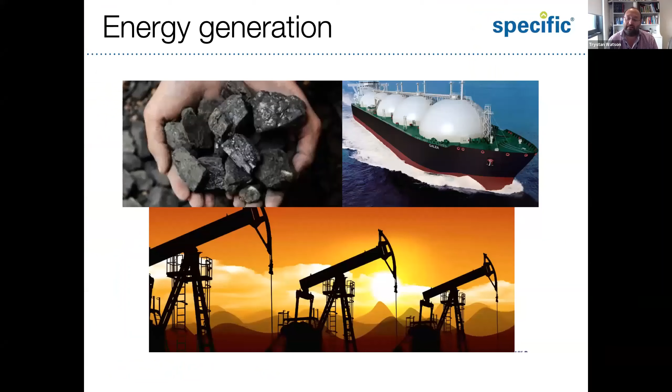It's really great to have the opportunity to present some of the things that we're working on and that we're interested in at Swansea. And it's an absolute pleasure to talk about how we might try and stop doing so much of this and just a little bit more of using this.

What I hope to be able to get across, and there's quite a mixed audience today, so there's a good chance that I will not put anything of interest to anybody, but hopefully there's something in there for everybody. That's the aim. But what I want to talk about is some of the challenges that we face in emerging photovoltaics, particularly as we look to work with people like Richard to take them on to the next level, because we have to be serious about that, even at the research and R&D scale.

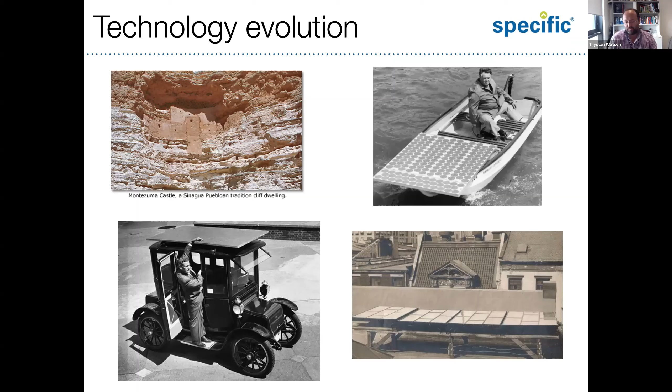But it's been going for quite some time, PV, right from the Puebloan people basing their houses on certain cliff surfaces, to the fact that PV in cars and boats has been around for a long time. And in fact, the first installation of building applied photovoltaics was actually over 100 years ago - Charles Fritts's roof of selenium. So we've come a long way, without a doubt, and we can now power boats and aeroplanes and cars and active buildings with PV. There's still quite a way to go.

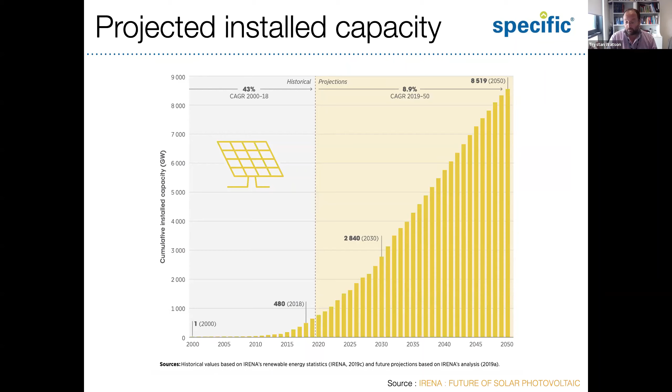And I think if we think about the current projections, and these are meaningful projections, I think, despite them being projections, that we're at sort of the 500 gigawatt of cumulative installed capacity at the moment. But the reality is, if we're going to meet climate targets, that we're going to have to go a lot further. And so there's a role to play both in the incumbent industry of silicon, as well as the emerging solar cells that a number of us are working on, including those in the audience.

Where are we in terms of solar PV technology status? Well, the majority of market maturity and penetration has been achieved by silicon solar cells. So for those of you that are perhaps not familiar with the technologies, those that you see on the roof, particularly in the UK, there's a very good chance that you're looking at a silicon wafer of a monocrystalline or a polycrystalline nature. It's potentially unlikely that you might be looking at cadmium telluride or CIGS, although it is perfectly possible, as they have achieved market penetration.

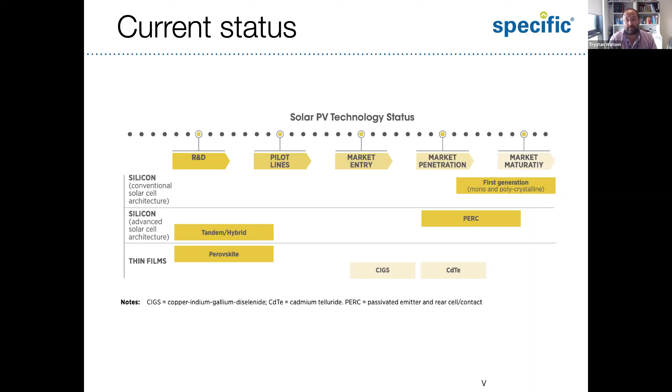If we move further down the technology readiness level towards the R&D, that's where the new technologies, the emerging technologies currently are. They haven't quite made market entry, and I'll talk a little bit about what those technologies are as we move forward. But those that have achieved a module that you could buy, and that have had companies that produce them and have some market share within the global PV deployment, are monocrystalline, polycrystalline silicon, cadmium telluride, and copper indium gallium diselenide, which is known as CIGS.

So the incumbent technologies, if you're looking at a roof, the chances are in 2020 that you're looking at a monocrystalline solar panel. They tend to take up at least 80% of annual production.

Also worth talking about, where does that production come from? That's a relevant consideration when looking at emerging PV. It's mostly Asia - 70 to 80% comes from Asia, and a large part of that comes from China. So if you think about a solar cell at the moment, there's a good chance it's a monocrystalline panel, and a good chance it was made in China.

That's the current state of solar research, solar PV at the moment. Looking at this graph in the top left, 2020, so some fairly modern numbers - monocrystalline and multicrystalline, also known as polycrystalline silicon, are the major technologies.

And the thin film market share, which represents cadmium telluride and CIGS, has changed quite considerably from a much larger value in the late 80s, around 30%, right through to being a relatively small amount nowadays, but still a credible contributor.

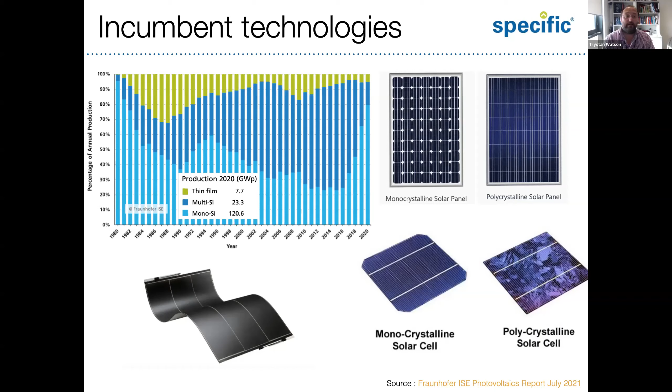The difference between monocrystalline and polycrystalline is the way that it's made. Monocrystalline cells are slightly higher efficiency, but also more expensive to make because of the purity of the materials required. But if you're looking at a roof, you're not looking at an emerging solar cell just yet.

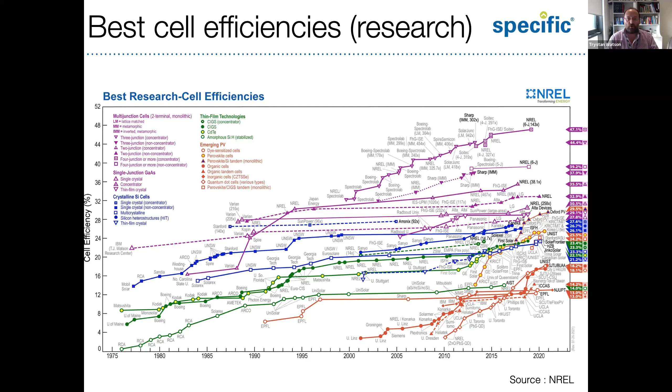What's interesting about the NREL charts is that there's another, less well-known version, which shows module efficiency - a very interesting take on understanding the evolution of technology over time. You can understand how big you can make this device, or how far it is towards being able to make something with large integration value.

And the reality is, even perovskite single junctions have been made at the sort of 800 to 6,000 square centimeter scale. In Swansea we're making that sort of lower end, small module to higher end submodule size. In fact, we make some in the small module area, and I'll talk about them in a minute.

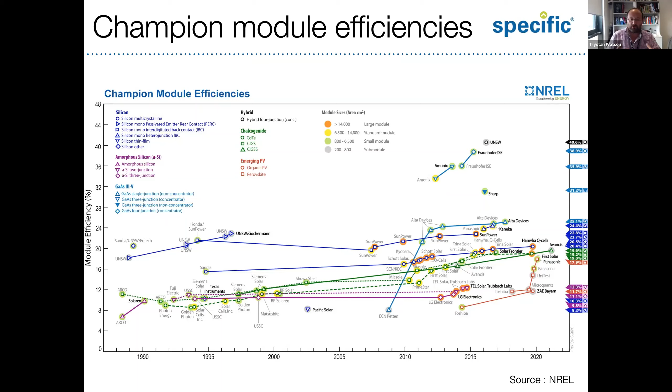So these technologies really are emerging into a new area. Just to clarify what I mean by emerging solar cells - you could describe solar cells as having three generations: the first generation of silicon, the second generation of thin film, and then the third generation, which we might classify as perovskite, organic, dye-sensitized solar cells, or perhaps colloidal quantum dot.

There are other inorganic materials that also act as very nice photo-absorbing materials, which are also emerging in that area. So that's what I mean by emerging, and we work in Swansea on perovskite, dye-sensitized, and organic solar cells - some of them do have market activity, with startup companies.

Oxford PV, for example, leading the way in perovskite, Powerroll looking to deposit perovskite on their substrates. There are a number of dye-sensitized solar cell companies, but it's not the sort of thing at the moment that you could go on eBay or Amazon and buy. It's not quite there yet.

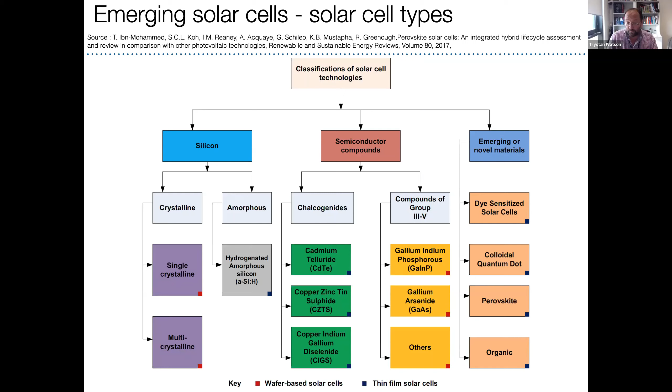There are still some things that need to be worked through, but over the next year or the next few years, we're likely to start to see some level of market penetration.

New technologies, emerging technologies, have to be able to offer something new. If they're going to challenge what is an established industry of 40 years heritage, then the reality is it needs to be different. And emerging solar cells do have something new to offer.

Firstly, they can be semi-transparent. Yes, there are some existing technologies, amorphous silicon, that can achieve something at that level. They're flexible, which I think is also key. And they can be manufactured at relatively low capital and materials costs.

Now, the silicon industry has a huge economy of scale in the sense that it's made in massive quantities, and a lot of those costs have been worked out. However, the entry-level cost of getting into the technology is still very high. The capital investment for purifying silicon is still quite high. So there is an opportunity for emerging technologies to bring that right down.

What these things offer, for example, and we're developing in Swansea, is the ability to do it via printing processes or ink deposition. So you take a liquid and you deposit it down onto a surface, be that surface metal or plastic or glass. And then it's flexible. So there are some design capabilities or deployment potential that an emerging solar cell can achieve.

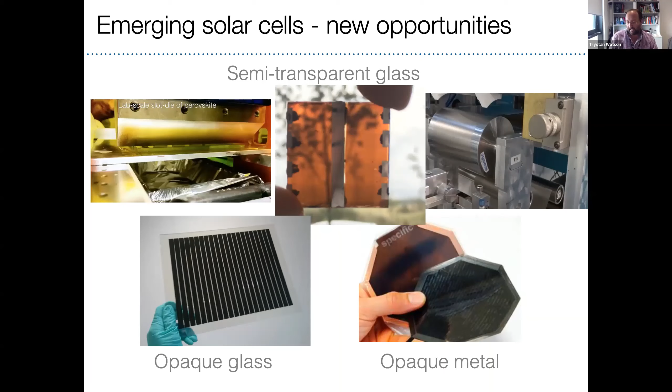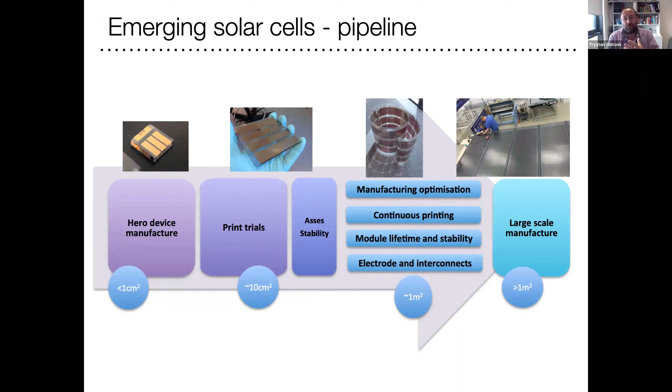But of course, there is a pipeline to getting something which has just come out of the lab onto a building. Even before the work that Richard is going to present later, there has to be some considerations of how we do it. It's not a linear process, but I've attempted to present it like this. You go from hero device manufacture of tiny devices, you trial the processes, and then you have all of these newer challenges in manufacturing optimization and interconnects and module lifetimes and stability that perhaps the physicists have been less involved in and the engineers are more involved in. And it's that hybrid relationship before you can start making large modules.

In Swansea, we do it via a roll-to-roll process on the left, as you can see, and on a sheet-to-sheet process. And perovskite, for example, lends itself to both of these types of fabrication. So there are benefits to roll-to-roll. There's a massive high throughput. You can link it with incumbent industries, for example, the steel industry, which deposits organic coatings via roll-to-roll, and then you can produce them via a really rapid, high-volume process.

From sheet to sheet, generally is a lower capex. You can do it via screen printing, but typically is a batch process. So all of these considerations are relatively new in emerging solar cells. Everything is relatively new if you're developing a technology for the first time.

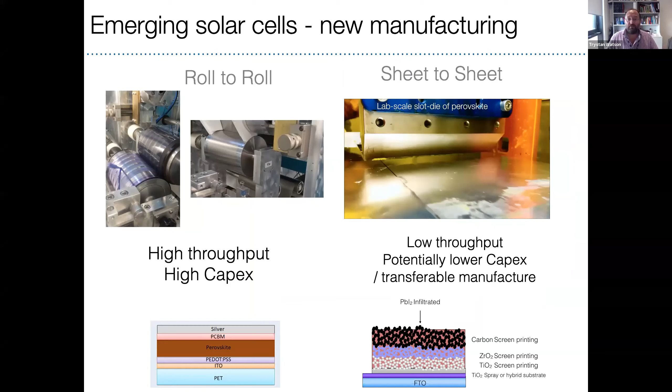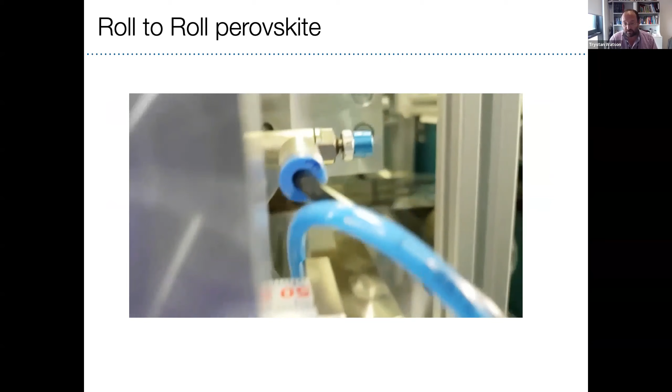So very briefly, in Swansea, then we develop a roll-to-roll perovskite, which requires us to print the liquid down and then heat it up and convert it to the perovskite. So there are challenges with regards to understanding the coating processes. We develop roll-to-roll devices of this nature at about 12 to 13%.

So it is feasible to translate this new technology, this new emerging technology, onto a high volume production process. And there are still quite a lot of things that need to be addressed in terms of the coating parameters, the stability, the performance, the electrode contacts, but the feasibility of it is absolutely there.

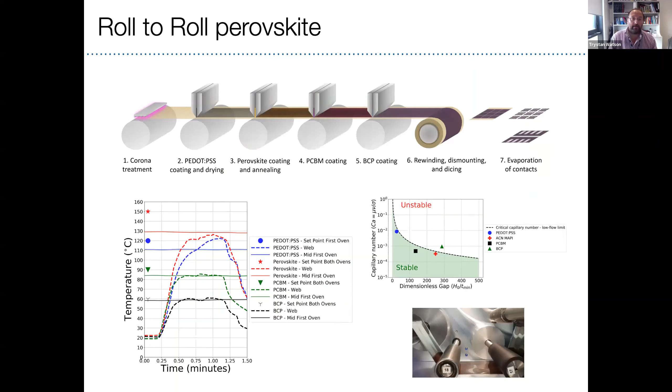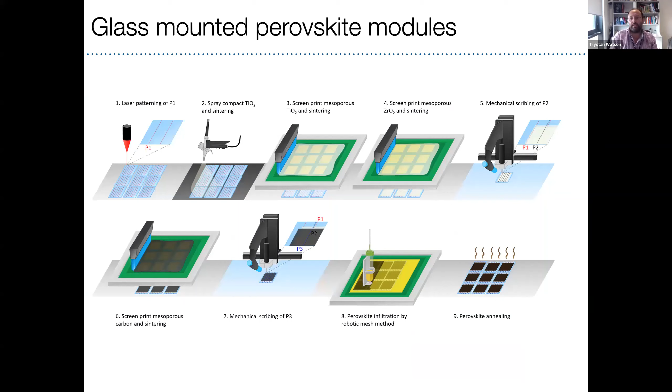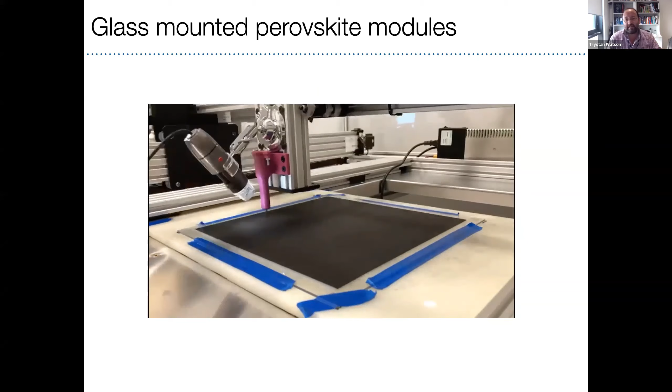If we think about the sheet-to-sheet alternative, then we can screen print perovskite modules. So we can use a really low capital cost process to be able to produce modules of huge size. And so we've been trying to do that at Swansea to try and show that we can use low capital investment. So this is us developing an interconnect in a large area perovskite module, which we then hope and are in the process of transferring over to our building array measurement systems. And we can put the perovskite into those devices via automated process.

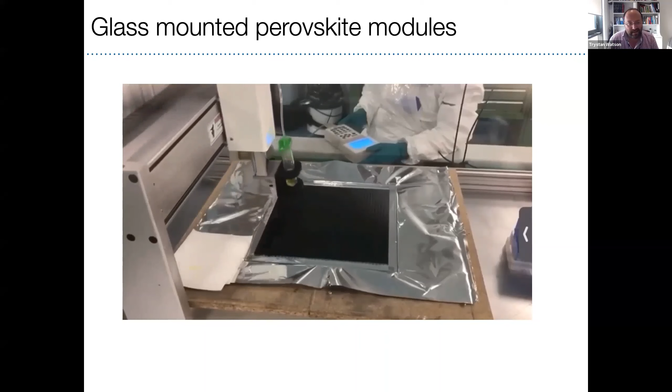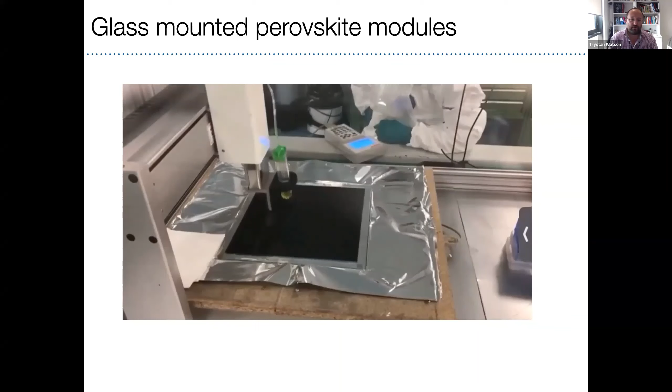So the reason for showing some of these images is to say that in emerging technologies, often the method for making the devices doesn't exist yet. The factory doesn't exist yet. The manufacturing process doesn't exist yet. So you have to try and develop those processes as you go along. And perovskite is an ideal example of where dropping a liquid into a mesoporous structure, in this case, hasn't been done at scale in a particularly effective way for solar cells. So this is us developing our process.

And as a last slide, we're now producing large area perovskite modules of what might be classified as a small module size. So it absolutely is feasible. And the question that comes next is, how do we engage that in the building?

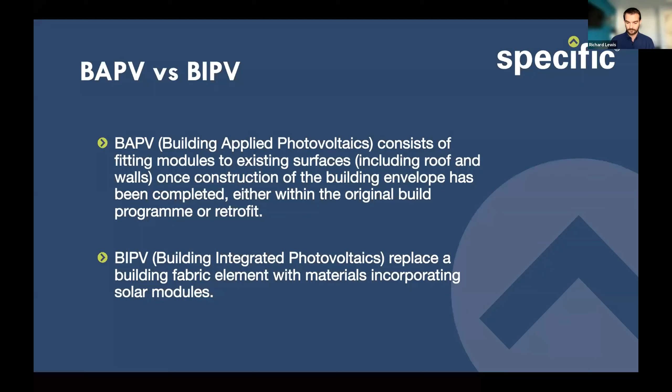Other options are roof tiles, mainly for domestic, not necessarily much for commercial, but examples such as the Tesla solar roof is coming on availability in America here soon, but that would be replacing either slate or roof tiles that you'd have on a normal domestic premises.

So chemistries and their impacts on the construction elements: crystalline silicon is traditionally the most predominant in the market and can only curve along a faceted profile. So if you have the cells, they have a 100 to 200 millimeter flat section, and you'd have a faceted profile if you put that on a building.

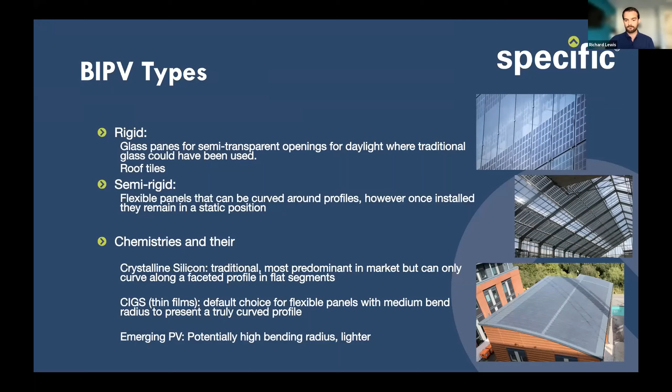So what I'm primarily here to talk about is how it impacts the build program. BIPV panels, as they're part of the structural design, changing them after the construction has begun is a big problem. Normally with other PV that could go on the top of a roof, once the specification is made, there may be some alterations with the actual exact panel that ends up on the roof during the final stages of the build program. And that can usually be coped with because the framing system can accommodate different size panels, and the exact layout can be altered on site due to penetrations through the roof or extract or things like that.

But BIPV, once it's designed for the building and shipped to site, it can't be modified. You can't cut into the middle of a pan section to add a feature of the building that's been delayed or added at a later date in the construction cycle. That's a key thing that needs to be considered once the design is made for the structural component the BIPV is part of - no changes can be made.

Lead time and the arrival to site is also critical. BIPV, as it's a higher integrated product and not just a normal structural component or steel pan section, has to go through that additional process to be manufactured. If there's a delay in that process, it's going to delay things like the roof being watertight or the structural integrity of the building being complete, ready for the next stage of the build program.

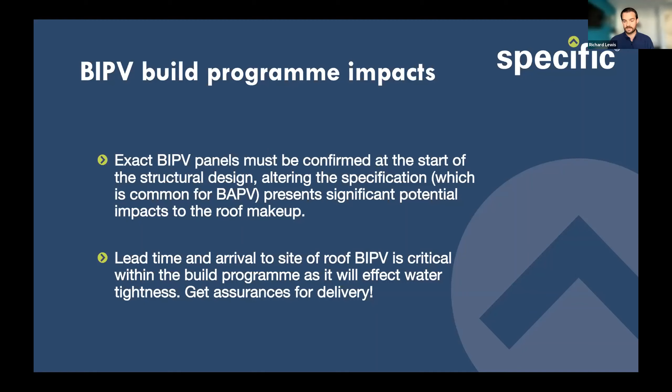One thing to consider is that BIPV on roof structures - there will be a tendency to want to enclose that and the string connections. In the actual wiring regulations in the UK, every connection should be accessible for inspection, testing and maintenance, and that can become a problem if you bury these connectors in the structure.

So there are ways to mitigate that, and BIPV on glass roof panels allow connections to be accessible in removable frame components. That's a design detail that needs to be discussed with the manufacturers of the glass panes and the framing system. However, BIPV on steel cladding in enclosed roof voids present different challenges, and they must be permanent and maintenance free. By default, a lot of the MC4 or EVO connectors are defined as maintenance free and tested and certified as such.

But a lot of contractors may switch out for a different vendor of MC4 string connector, so the cables coming out the back of the panel, joining them together in strings, need to be specified and ensured that they are certified for their intended use, which is a permanent connection that is not accessible. This needs to be really verified with the PV and roof installation contractors in the roof scenario to ensure that it's actually going to be as specified.

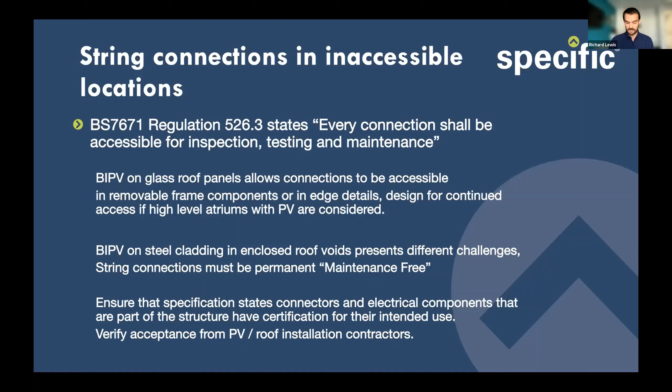So design considerations generally for layouts - you need to really allow for an acceptable loss of a certain percentage of the PV array before having to replace part of the roof. It's the last thing you want to do is to have to change the roof just because of a loss of some of the array because of connection failure, panel failure, or mechanical damage.

And the design of the PV strings then would be - it's an opportunity to design them in a slightly optimized way for maybe at some point needing to do maintenance or replacement of part of a building structural component.

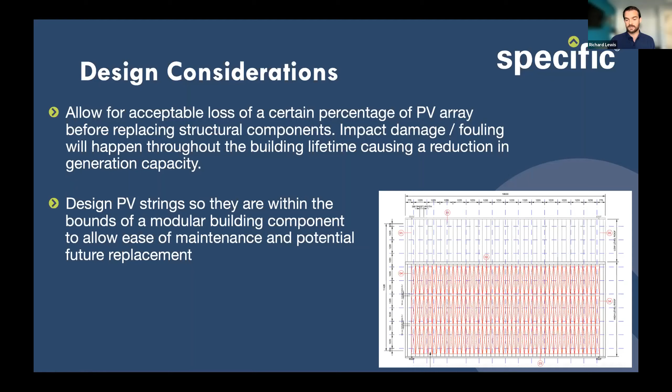And temperatures in there can reach up to 50 degrees as it's part of the roof structure above the insulation of the building. So the connectors need to be suitable for the job they're doing and certified to ensure they're not cheap alternatives that could melt, which we have seen in other installations.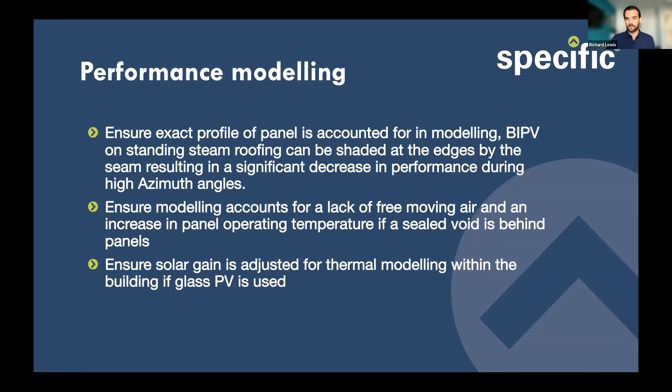Also allow for the moving lack of free moving air around the panel. In a normal framing system, there would be a section underneath that would be a void that might allow free cooling. However, in these situations, they're not.

And then the last slide really is just performance monitoring. System level monitoring should be by default - we monitor extensively everything in our buildings from the generation through to the demand. It should really be part of the acceptance criteria for the installation being complete. We do speak to a number of partners who have had issues with monitoring not being put in place or being completely removed from the package, having to be an additional or retrospective snag that's gone on for quite a while.

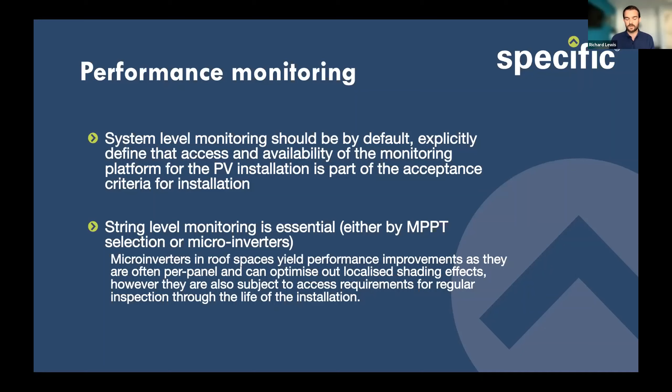That's something to really consider to make sure that's in there. String level monitoring is also essential for integrated BIPV panels, because you want to be able to assess whether part of the array is failing and then mitigate that by maybe scheduling maintenance with a structural component replacement, which is rare, but it's something you'd need to establish, whereabouts within the roof structure would need to be replaced in the case of roofs.

And that's pretty much everything I have to say this morning. Thank you for the time, and I'll hand back to Joe.

Okay, thanks, Richard. Yeah, that was very interesting. Interesting to think about the temperature of the connections as well as just the actual PV, which, you know, something we might not necessarily have thought about. So yeah, that was interesting.

Okay, so we don't have many questions so far in the Q&A box, we have just one at the moment. So somebody has asked, what would be the expected useful lifetime for a BIPV building panel? Now, I guess that depends on the type, but I'll leave it to you two to answer.

Go on, Rich. Okay, so for our building, they're on Tata panels, so they are warranted for, I think, 40 years, unless I'm mistaken. And our PV panels carry a warranty of 25 years from the manufacturer we got.

I think there's a context in terms of emerging PV and how do you match the building. I think you have to plan to try and match the building guarantee, right? So even when we're working on emerging PV, we have to think about 20-25 year lifetime targets. What's interesting is that there are some silicon solar cells, for example, that were made in the 80s that are still functioning, that have gone way beyond that, some of the incumbent technologies.